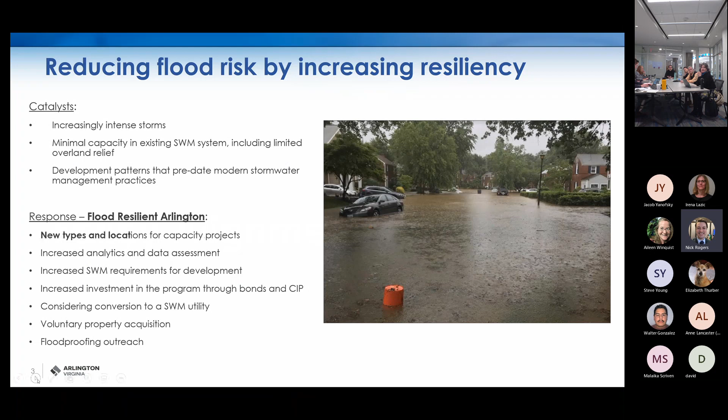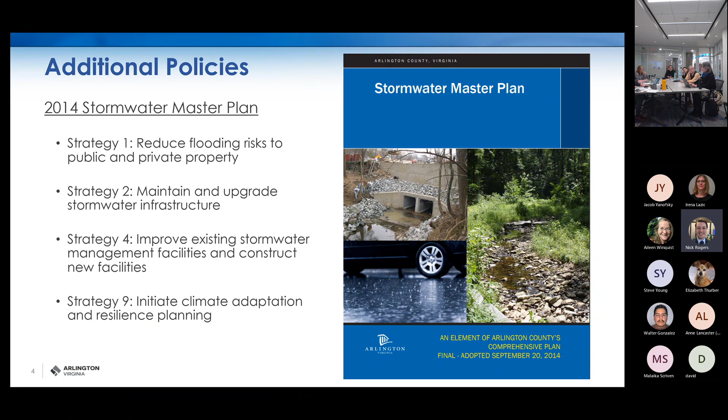So there's a couple different points of policy perspective to familiarize the commissioners on. The first was obviously Flood Resilient Arlington. We have this body of work mentioned in our 2014 Stormwater Master Plan in particular. I won't go into great detail, but the relevant strategies are included on the slide here and in the memo that accompanied our presentation this evening, as well as the Public Spaces Master Plan.

I want to highlight three key bodies of awareness and consideration informing our work. The first is the historical positioning, nature, and development of our park system. Irena is a much deeper expert on this than me, but a lot of our early parks and major parks were located in environmentally sensitive areas along stream channels within what we now call floodways, floodplains, and resource protection areas, though we didn't have that vocabulary at the time. So inherently, there is a demand for environmental sensitivity with much of our park system.

Number two, the population growth. Think of the work you hear consistently from Ms. Hardy and Ms. Garrett in our group. The county continues to grow. With that population growth, there continues to be a demand for all sorts of athletic and leisure space, among others. And then also what we've colloquially termed emerging trends in park design.

This is a way of saying that with our public spaces, we are trying to be more multi-purpose—for basketball users, pickleball users, Tai Chi users, and folks who enjoy natural beauty. The parks are trying to do a lot in smaller spaces. Approximately 47% of our parks are 2 acres or less, and we have plans to grow the park system by 30 acres by 2030. So there's an element of space and efficiency you'll hear about tonight.

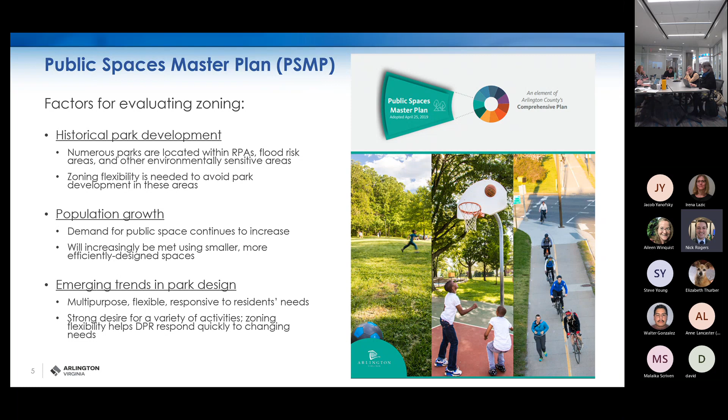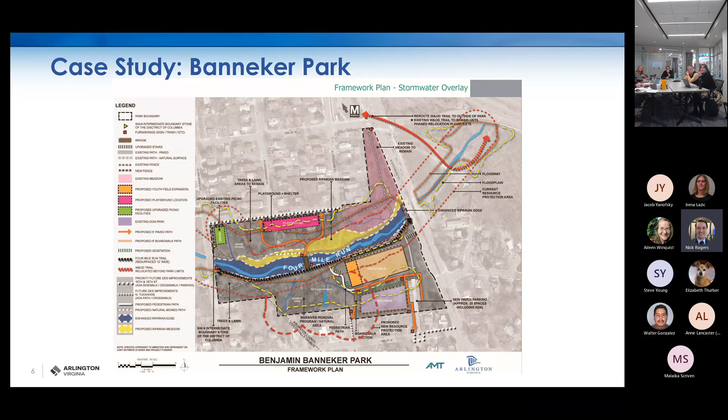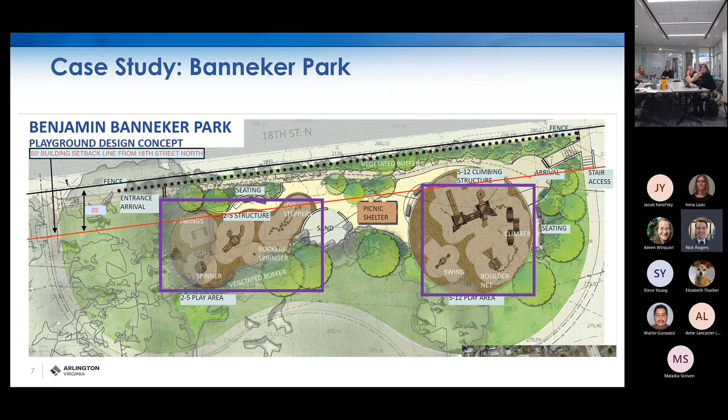I think Banneker Park has been the example we've used internally to illustrate this most. This image from the framework plan shows all the environmental constraints that went into it. Layering on top of that, when we impose zoning standards like our 25-foot street setback requirement, you can see how the play equipment—which ideally would be away from Four Mile Run—ends up getting pushed back toward the street because of that zoning standard.

This is a piece of a larger body of work included in the PSMP action plan. I keep coming back to the CPHD work plan—we recognize there's a lot here, and a piece of it is included. We're working closely with DPR on phasing additional elements of PSMP implementation into our work plan. Much like the work from Mr. Hogan, you'll be seeing more of this in the next calendar year. One piece of feedback we got was, 'well, why just this? Where's the rest of it?' We're continuing to work on that.

I do have questions and comments on this, but you might cover them as you go forward. So I'll keep going. Keep going. All right.

So I'm going to go through these. I'm going to play my best Liz Thurber and/or Aileen Winquist impression with the types of facilities we're talking about here regarding stormwater management facilities. The one that comes up most is the underground detention vault, which could be of various sizes.

Commissioner Gearing: I've asked Commissioner Lynn to tell me what this is over the last few years because I asked and didn't know what it was. It's an underground detention vault. That's the one still under construction at Cardinal School, right? Yeah, that's right.

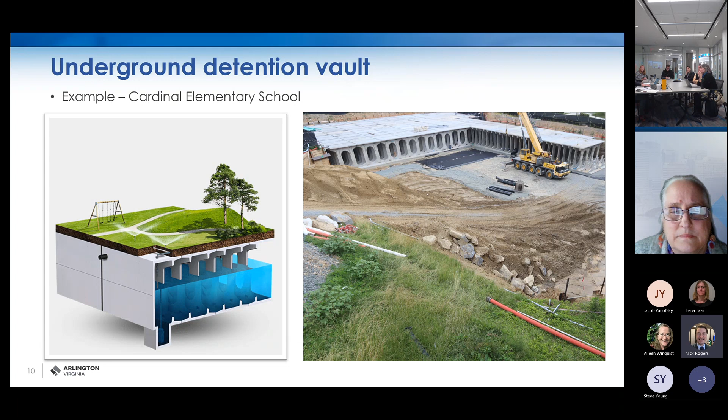I'll let Liz and Aileen speak for themselves, but I get the sense that this is a type of facility that is under consideration for other areas. Woodstock Park won't be the only one we end up seeing, it's actively being considered. It's probably the biggest one though, the others probably won't be quite this big.

What was the other one? Woodstock Park, so you mentioned it's one of the biggest on this list in the Mid-Atlantic area, right Liz, we have heard from the companies. Right, it's one of the largest because it's precast concrete, probably in the Mid-Atlantic states, possibly even the East Coast.

Arlington is looking at other sites and watersheds, but probably none as large as this one. The truth is, you can't see it now—it's pretty much buried. You don't see anything except the manholes right now. People won't know, they'll have a baseball field on top, so they're not really going to know it's there.

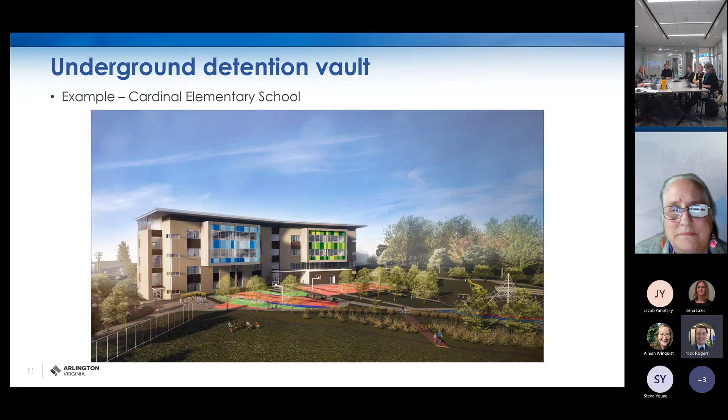Commissioner Peterson: Arlington does a lot of innovative things, we try to stay ahead, and we're being really ambitious with our community energy plan. I'm hoping universities studying this sort of stuff would look at Arlington as a case study, though I don't know how that makes it into academia. Commissioner Karen might know—they need to write it up, maybe for a planning magazine. It's a real opportunity for us, and we may look for any potential awards to recognize this. Good conversation—conversational, I said, and I'm getting exactly what I asked for.

So the underground detention vaults are not the only facility DES is considering. There are several others, including various types of overland relief measures, providing safe and semi-channelized spaces above ground in critical flood conditions, so if the pipe system gets inundated, the water can flow somewhere.

Commissioner Lee: What I want to know is, is there a way to have overland relief measures where the land can also be used for recreational purposes when it's not flooding—more than just a path along it? Could we have a simple playground or a bocce court as part of the overland relief? I'm asking because right now there's a controversial area on Langston Boulevard by Spout Run, where we're trying to create overland relief at that intersection, but it would mean lot consolidation and needs incentive since it's private property—the county's not going to take it. So how do we incentivize the private sector to allow something like this on its property? Could it be done so it isn't simply overland relief, but also provides usable park space?

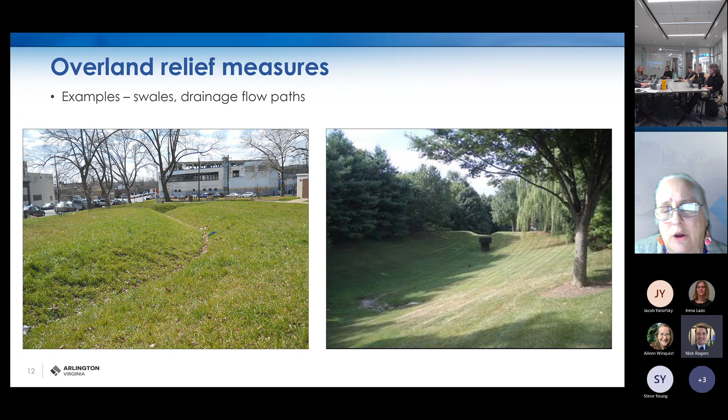Okay, nobody's precluding the use of native plants. Great, that's all I needed to know.

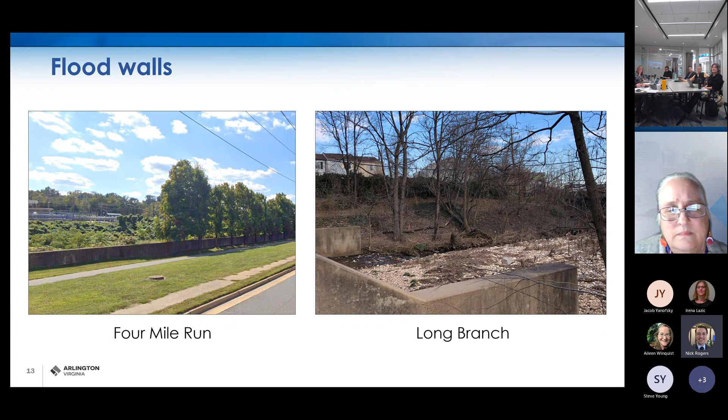Thank you. In your ZOCO memo we do make mention of a couple other types of stormwater management facilities that could be utilized in some instances. There could be examples where a flood wall is needed - we have examples of some of those in the community already. We could also have some utility with a pond, whether it's a wet pond or a dry pond. That is a type of facility that could be utilized.

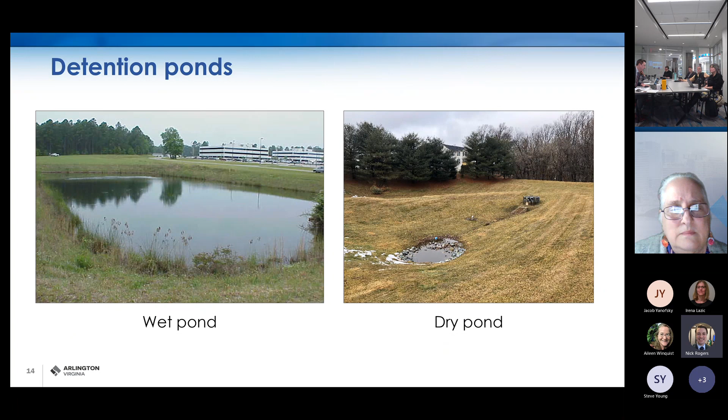Yeah, we're using those dry ponds in a lot of places, some that are literally the size of this table. They're so tiny, but they're cool because they're pocket - you can put them in all sorts of places. That's great, the more we can do that, the better. I've seen them in the medians of roads, I've seen them in parks, they pop up in all fascinating places. Every one of them is small, but a lot of them end up making a difference, so the more of those, the better.

I know the county used to have a program where they would pay for part of a stormwater feature project. Yeah, and I did a tour and they brought us to an apartment, like garden apartments, and said look, the county paid for this one on this private property. So I don't know if that still exists. I often tell people on my neighborhood listserv to look into a county program when they ask. Yeah, it was the Stormwater Wise program.

That was cut during the COVID budget adjustments. But one thing we are looking at now with the stormwater utility is a potential change, and there may be credits available through that program for things people have done on their property.

So it's a little different, but similar. I would like to clarify that the zoning requirements we're talking about today are not for lot level type of improvements. We are trying to talk about things that will serve more than one lot in a region. I just wanted to clarify this is not for the lot level.

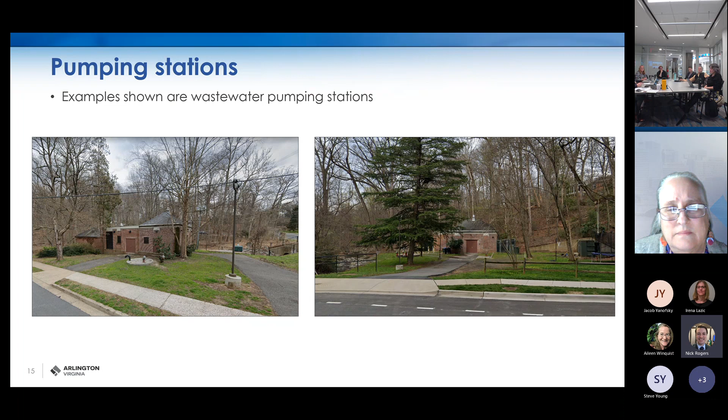So a couple of other examples: there may be instances with changes in topography where a lift station is needed to transport stormwater up to a pipe at a different level to catch grade. We have pump stations as part of the wastewater system at about 14 locations in the county. They're all enclosed with a masonry structure similar to what you're seeing—these are actual sites in Arlington. So DES would intend, if a pump station was needed, to do something similar to what we've described. I imagine the facade elevations would again be shared with and subject to the community engagement process ahead of that.

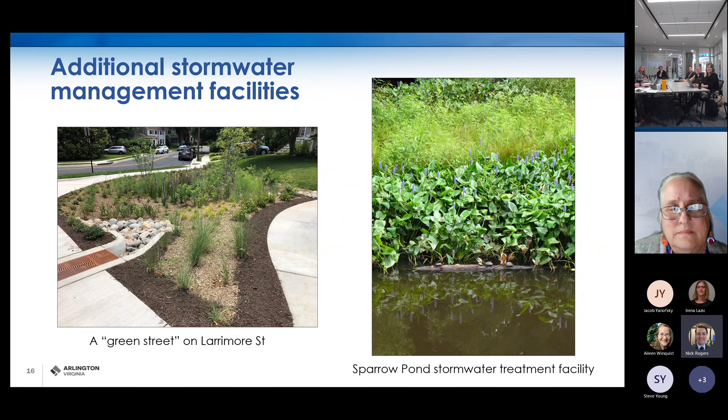This may be one of the small detention ponds you were describing on Larrimore Street. I understand they're really cost effective because if you build enough of them, you can avoid much bigger projects. Will we continue with more of the green streets, like what's on John Marshall? Sure. Okay, that looks very effective too.

Right, that was as part of the stormwater master plan, almost 10 years ago. We did a study and found potentially 1,100 locations, and we've narrowed those down and been building the more cost-effective ones that get more water quality benefit and more treatment.

Does DES keep an inventory, so when a street gets a major rebuild, that's the time it becomes cost effective, because you're doing it as part of a larger project? Yeah, so that retrofit study—those locations are included in the mapping system, so when other departments are doing projects, they can see that potential locations were identified there.

Our staff collaborate a lot with the neighborhood conservation program, and also with Water, Sewer, Streets when they're doing wastewater pipe or drinking water work—if they're going to dig things up, we'll collaborate on that too. It sort of drives me crazy when we do a project like a bump out, and the bump out's this enormous piece of concrete.

Why didn't you just put one of those in, where we didn't need that much concrete? The sidewalk was already so wide. Yeah, they're definitely working with the complete streets and neighborhood conservation efforts on that. So a lot of the projects are actually going in combination with those projects.

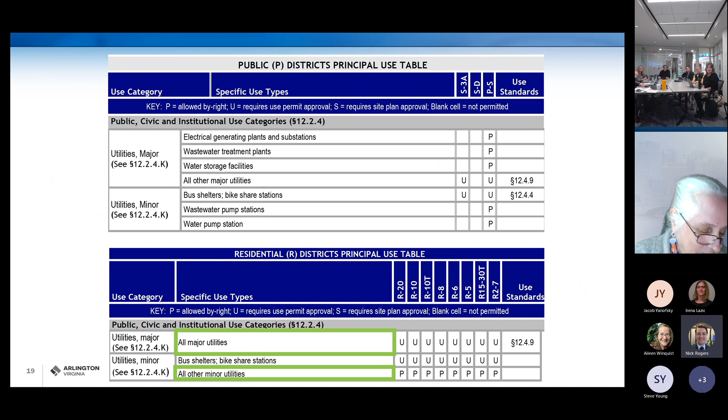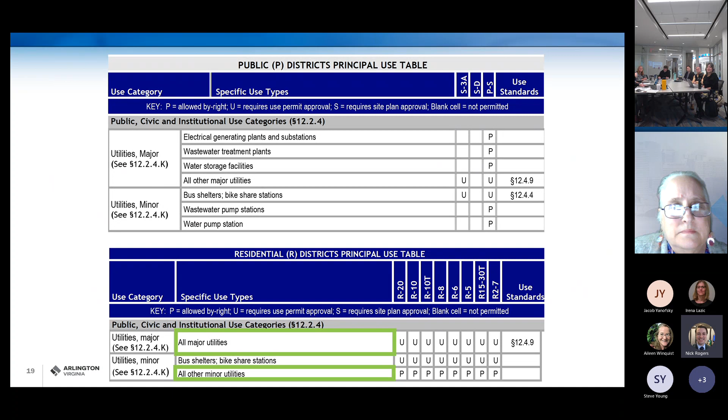So we have those use categories, and taking a look at the lower half of the screen, this is the use table for our lowest intensity districts. By and large, major utilities need a use permit, and minor utilities are by right. The stormwater management facilities we've been talking about would be classified by and large as minor utilities.

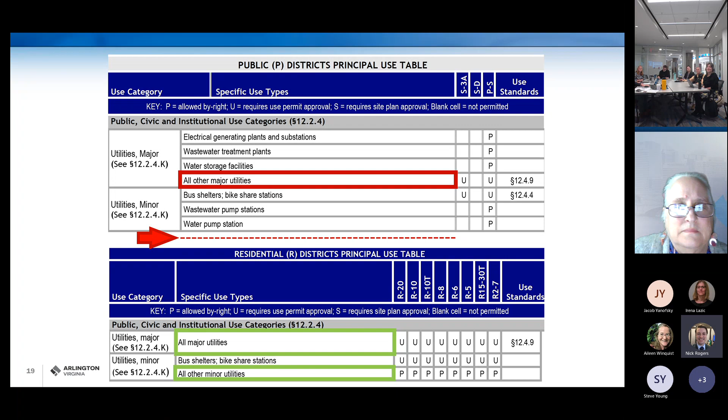Compare that to the public district use table up above. We have the major utilities row that's there, with a use permit in S3A, a blank for SD, and a use permit in PS. But for the minor utilities category, we have no row there at all. And when there's no row, that's equivalent to prohibited. It's a do not pass go - don't even look at your $200.

So a clear issue that this text amendment is trying to correct. First off, as far as our setback requirements go, in the much maligned Article 3 that Mr. Hogan was referencing previously, within our setback areas we prohibit by and large the placement of structures. What is a structure? Basically anything that's attached to the ground.

Fences, light posts. And I know I'm touching into a sensitive area per the commission's conversations about Arlington Junction Park, but I'm glad we're having this conversation so soon thereafter while it's fresh on your mind. There are implications with this from a stormwater perspective, mostly for above ground, not necessarily for underground - if it's below ground, that can encroach per conversations we've had with the zoning administrator. But the trash rack that pops out, for example - would a manhole count? Did it have to be in the setback?

Probably not, that would be fine, because think about the rules related to patios - if it's below 8 inches, it can encroach in. But the stuff that's coming up above, where this really gets to be a pain point, is with a lot of our park features. Your trash, your bike rack, your recycling receptacle, your play equipment, your dugout for the softball team - all of these are affixed to the ground. They're considered structures, and they have to meet the setbacks prescribed here.

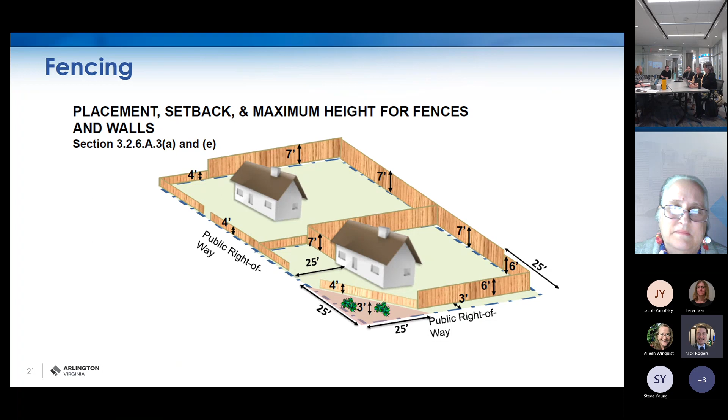No, that's all this is. Jim's like, I'm sold. I get it. And it won't be in the zoning ordinance - it would just hope DAS, when they build these types of fences, takes the actual design into account, because a chain link fence looks awful even if it's all about safety.

There's lots of good examples in the county of good fences in park areas that we should be encouraging, while avoiding the chain links. You could put cups in that and make a cool little design. Yeah, you're looking at it all wrong, wastewater treatment, Jim.

So I feel like I'm beating a dead horse, but that's another thing where the public engagement process is going to come out - it can't be in the zoning ordinance. I get it, that chain link fence issue, hear it from me. I'm expecting some adverse feedback from members of the community challenging us to do better on that front.

Last month, and I can't remember the exact nuances of it, but we were trying to increase the height size of a fence around the bus parking. Is that related to what we're talking about now? Probably not, I'll have to go back and see. Is that zone just one of the public zones? The neighbors came out and said you advertised this during Thanksgiving, we didn't know - but it was a miscommunication because it wasn't going to impact them. Is this also an Arlington Junction Park thing?

No, it was related to the bus parking facility. Is it across from Green Valley? No, it was the facility down there. Oh, I thought it was Quincy, in North Arlington. Quincy, the one across from Washington-Liberty High School.

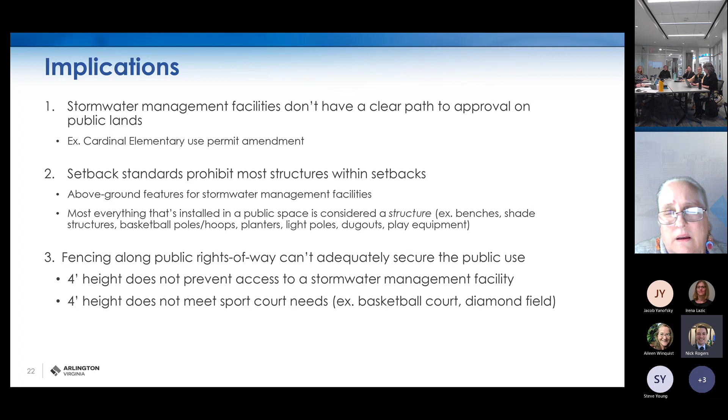Would it be possible to cite? I'm having a little bit of a hard time understanding exactly what we're talking about. I know we talked about retaining walls and then having the railing on top of that - that kind of makes sense to me, and I understand it. I'm unsure of where we would allow an 8-foot wall along a right of way that would make sense. I imagine you guys wouldn't even propose that.

So I'm wondering, what is the problem that we're fixing? Beyond the corner and beyond the setback, where would we need a 7-foot wall along a public facility? I'm thinking of the Virginia Dominion, right here over by Northside Social. Is that what we're talking about?

Some sort of utility that would have to be enclosed in such a way that would require it. I think for the stormwater, if there was a facility there with some equipment, that would just need to be protected. We're actually looking at some concepts in some watersheds where we would want to provide overland relief and a place for water to flow, and then we might need to protect nearby homes with a flood wall.

I think that's the answer to the question you're asking, that we do perceive there might be some places where that would be required. So is it really channelization as a practice, I wouldn't necessarily call it that. It would be to limit the inundation area, because some of these areas are flat and might be too wide. We want space for the water, but we're also protecting nearby houses. So not necessarily creating a new channel, but just maybe putting a barrier, keeping the water from encroaching into private properties.

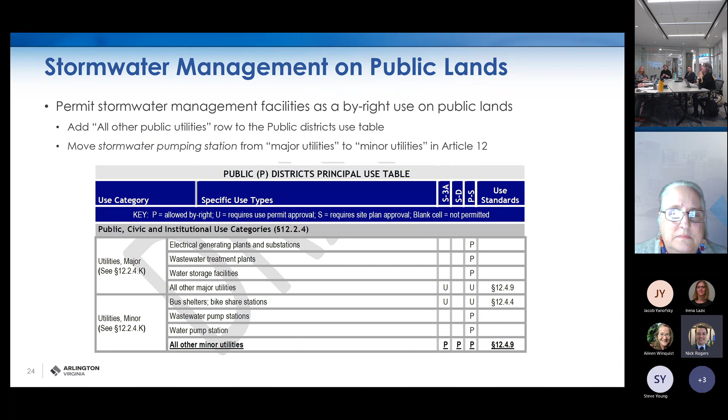There's the adjustments to the public district use table, with a host of different options for setbacks. The text in attachment 1 doesn't list each public space feature, but we do list them in the memo. The feedback from the zoning administrator was that zoning shouldn't have an entirely long, explicit, exclusive list—there's some generality and descriptiveness in the language we've drafted to give flexibility for new types of facilities and amenities to be considered. This list in the memo is what we mean by accessory structures encroaching into a required setback for a park. Keep in mind everything in attachment 1 is scoped to either a stormwater management facility or a public space.

So for a setback encroachment, if we were to add any of these, would this go through PRC, or would it just be approved? For example, if we added lights not exceeding 15 feet in height, or a structure using sailcloth, would that go through PRC at least? I don't think you'd need a whole new park planning process. Sure, but would it go through any public review process?

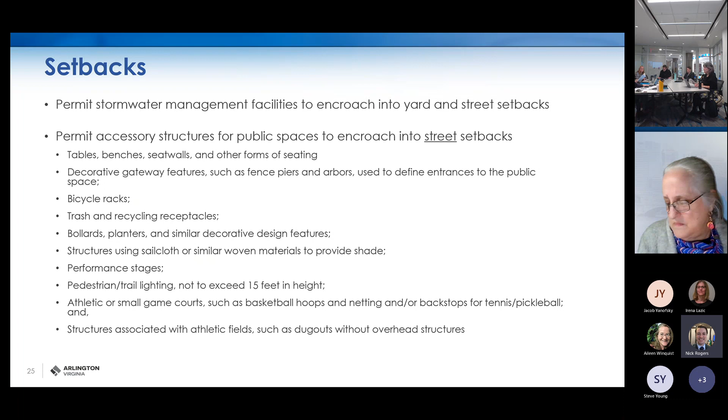Do we have any parks where we have overhead utility lines going through them? I haven't seen any, but I'm assuming that we do, some leftover. I would have to check. Telephone poles going over them, maybe. So would you have to get a use permit for the power pole that goes through the park, when it's in the setback area?

It's an interesting question, and they're not usually done by us—most of the time by someone else. But power poles normally go with the right of way, don't they follow the right of way, versus going straight through a park? But I wonder if it's like one of those leftover things—when you acquire land it kind of remains there. So it's an interesting question.

I have power poles in the backyards in my neighborhood, not on the street. Yeah, I know there are some in residential, I'm trying to think. And when we acquire lots to expand parks, I don't know if we necessarily can get rid of them, we may have to—so that's an interesting question, or underground them. Let me take a look at the time.

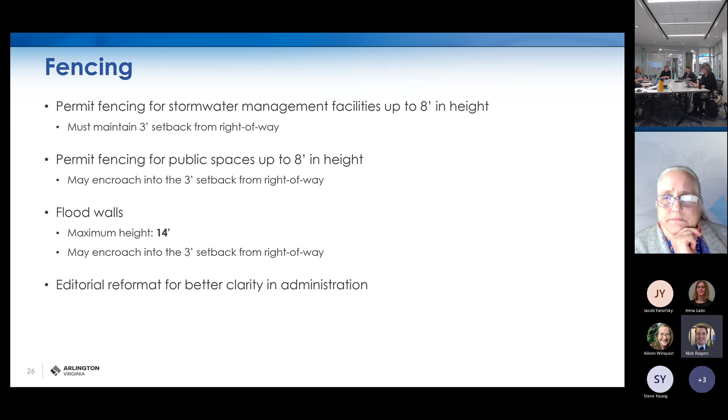So now from a pedestrian perspective, we have some slides that get to this. This is kind of what I was alluding to, Commissioner Sarli. Some examples here - I don't think any of these are 8-foot tall walls.

But one of the things we've talked about with DPR is changes in topography. We're not a flat county, we have hills all over the place, so sometimes there could be a low wall, other days there could be a taller wall or fence. In the instance of Lyon Village Park, where we have the tennis courts right there, there's a variety of different conditions where we already have fences and walls, some quite tall, right near the sidewalk.

And if the commission felt strongly about this and staff needed to continue working on some sort of offset language, for example, that would allow the fence or wall for a park to go right up to that sidewalk, but perhaps only in instances where there's enough width for a pedestrian, enough clear zone, we can take that. This is an area where we've continued to have internal conversations, and we're looking for direction and feedback and guidance from the commission.

Be careful with those, because we really do encourage sidewalks and clear sidewalks that people can actually use, with no obstructions. If the fence goes right up to it, I want to be careful, because we have a lot of really narrow sidewalks in this county that are substandard. I want to be very careful that we don't inadvertently discourage people from using those sidewalks, or create a situation where halfway down there's a power pole sitting right in the middle of that sidewalk, so the space between the fence and the power pole is this wide.

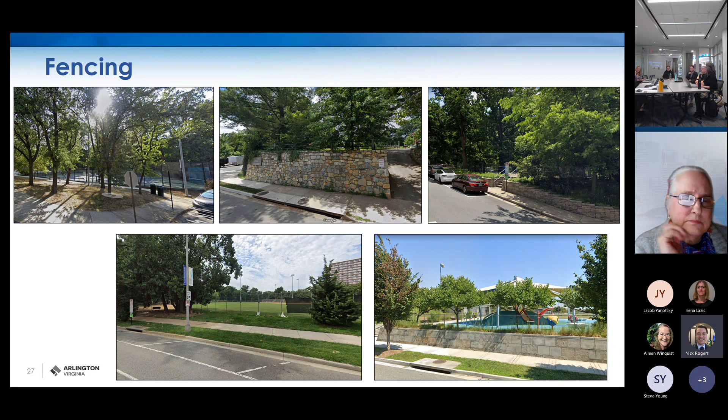So 6 feet is for dog parks and community gardens. Sometimes we have higher depending on the circumstances of the site, because deer jump, and that's actually a big issue for us. And that's for a fence, not a wall. There's always a fence, and it really has a roof over it now and it's locked for that purpose.

Sorry, I don't mean to be too pushy, but I am uncomfortable with putting in zoning that we can put an 8-foot wall along the park. That just doesn't make sense to me. No, that's why we're here, to get that type of feedback ahead of your public hearing.

Nearing the end, Commissioner Starling, we've had extensive conversations about the potential impacts related to auxiliary pumps as well as backup generators. Again, DES's strong preference, if at all possible, is for completely gravity systems, where gravity by natural forces is draining the water out, discharging through gravity functions.

But the topography may require it. My understanding is stormwater is almost by definition gravity driven, it's very rare that there are exceptions. I think there's a preference to have it be through gravity flow. They historically followed old stream beds. The system overall is designed that way.

With some of these new facilities, depending on the site, sometimes if you make it deeper it gives you more storage. That's one option they're looking at with some of the vaults - depending on how much space we have, we can go down a little more and get more capacity, but then we might need a pump. So it's a trade-off. Liz can jump in - there's probably not a lot that would need a pump, but it's an option.

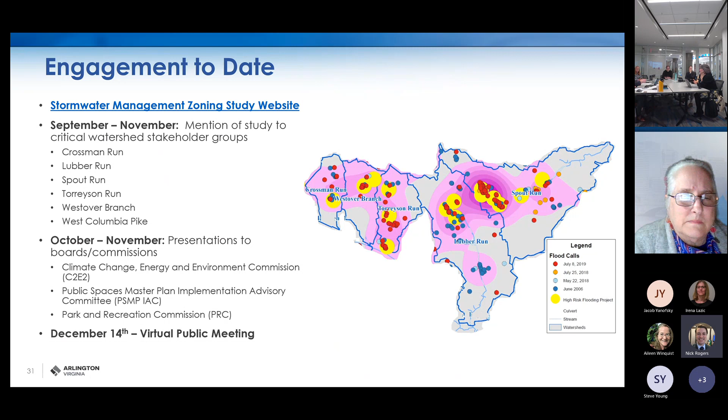Specific to engagement for this study to date, DES has taken a real leadership role in socializing the text amendment and this body of work with those six critical watershed groups that have been working with them, building those relationships as part of Flood Resilient Arlington. We've also done some informational presentations to C2E2, the PSMP Implementation Advisory Committee, the PRC. We also had a virtual public meeting on December 14th.

I go more into this ad nauseam in the memo you received over the weekend. But a lot of the comments that we've hit on tonight have also been things that we've heard from members of the public — the role of public lands and what they play in stormwater management. I'm happy to recount some more of that feedback on the engagement we've received, but I think it's aligned with and that we've accounted for it in our analysis and the recommendations we've received to date.

So depending on how we do this evening and over the course of any further engagement, we are on track for an RTA next month in February, and the commission would have a public hearing on this at their March regular meeting. Mr. Chair, further questions, discussion?

I have a further question, and it may be because I haven't followed this as closely as I might have. I think this is great that we're doing this. I'm concerned about the stormwater, but it feels like we're missing the forest for the trees, because we can do all of this, but if we keep letting development increase impervious surface area, we're always going to be playing catch up. So is there a parallel process going on to address that, or can we include under the catalyst increased impervious surface area as a result of increased development, even increased planned development? We know we're doing this. You guys in DES are doing a great job, but this remains a really big issue.